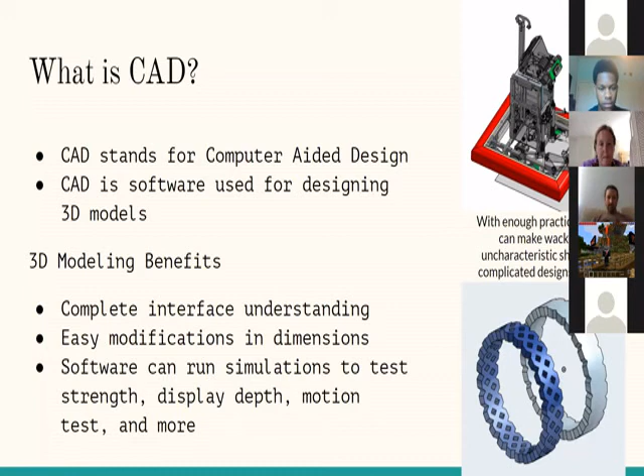So like the skyscraper example I used earlier, there's many different industries that CAD is used in. Some more obvious ones like cars, figuring out how to fit part X in place Y, all the way to graphics design and even game making. But it's primarily used in engineering, and that's going to be the primary focus of this class. We won't be going over the more digital design oriented CAD.

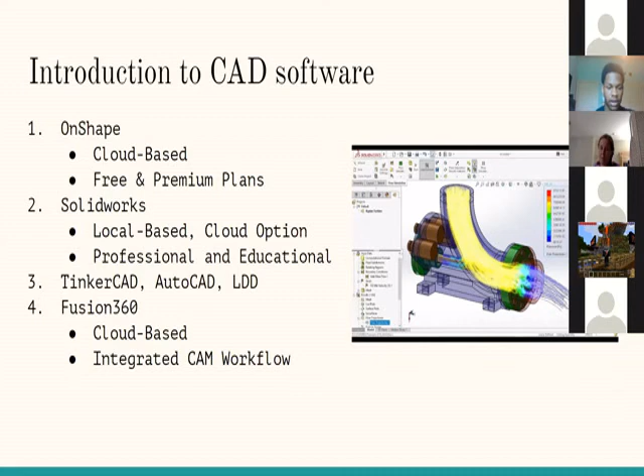All right, so it's probably about time we got started with the actual lessons themselves. So how these classes will work: we'll provide some objectives for the class and give the lesson, which will probably take up most of the class. Then at the end there will be a Q&A and a quiz, and once that's done we'll provide some fun practice activities for everyone.

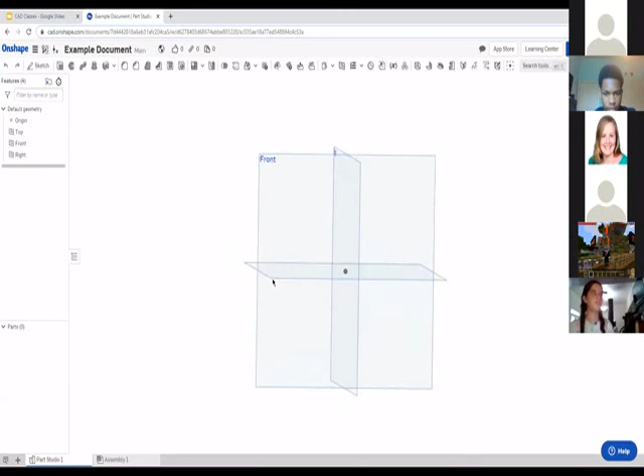So anyway, you'll notice that you can drag the view around. You see the top plane, the front plane, the right plane. At the top right, you'll notice there's a cube. This cube corresponds to the model and these planes.

If you click on the front face of the cube, it will put your view perpendicular to the front plane.

Then there's also the corners of the cube. You can press those to get a trimetric view. Same for right and top. I can click it.

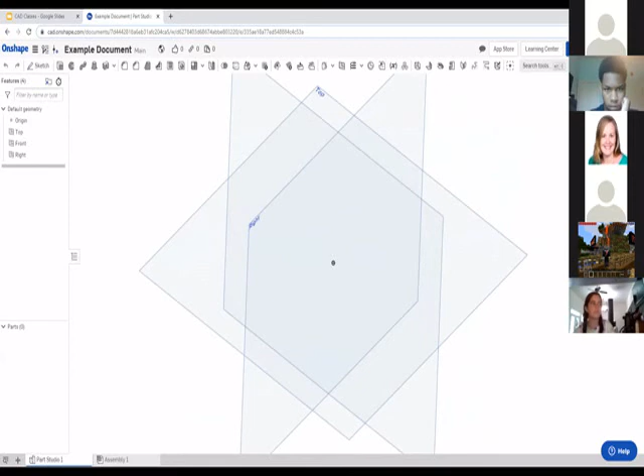And then you may think, well, what about the edges? If you click on an edge, it will take you to the opposite side. So now it says front backwards, and I am looking at the back of the cube.

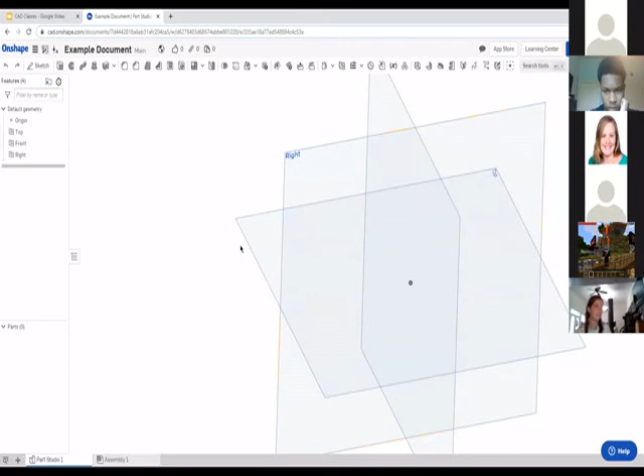Sorry about that. You may also notice there's a couple different options here. If you click the option box right by the cube, you'll see there is an option for isometric. This will take you to a view where one unit this way is the same as one unit this way or this way.

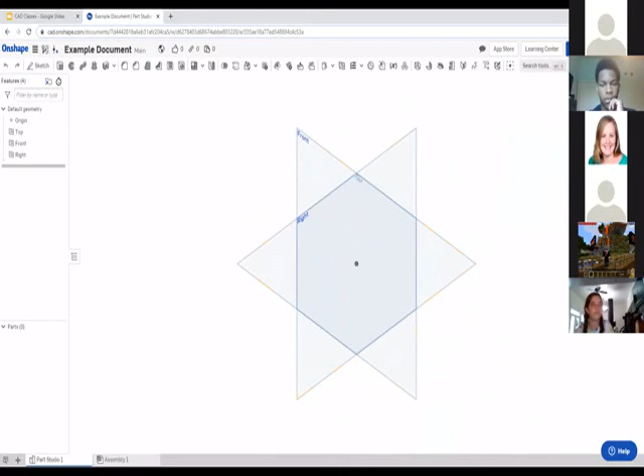It also looks kind of strange at times. It can lead to some fun optical illusions. Then there's also the dimetric view, where the x and y axes correspond perfectly to each other. However, the z-axis is slightly off, as you can see by this.

And then there's the original view we're at, which is trimetric. It's a pretty good way to get an overview of a part. It's also what clicking on a corner will take you to.

There's also some other stuff, like you can turn on perspective. By default, the editor is in a mode called orthographic view. This means that no matter how far away something is, or if it's offset, it'll still be the same size.

So for example, normally if you're looking at a super tall building, the base of the building, you're pretty close, you can see it fairly well. When you look up at the top, the top looks a lot smaller because it's far away. Orthographic view makes it the exact same size. This might be a little weird when you first start using Onshape, but as you use it more, it'll just feel natural.

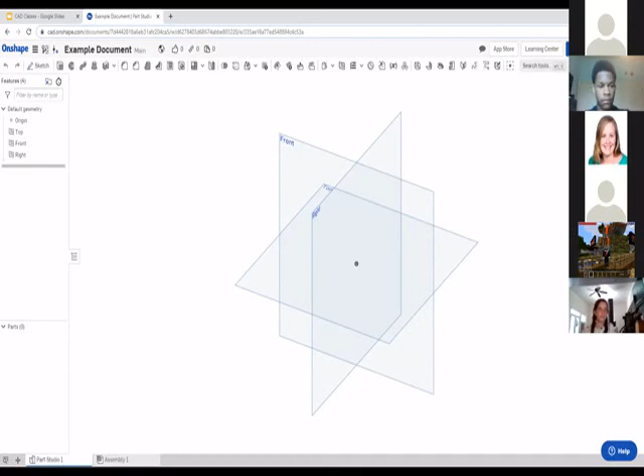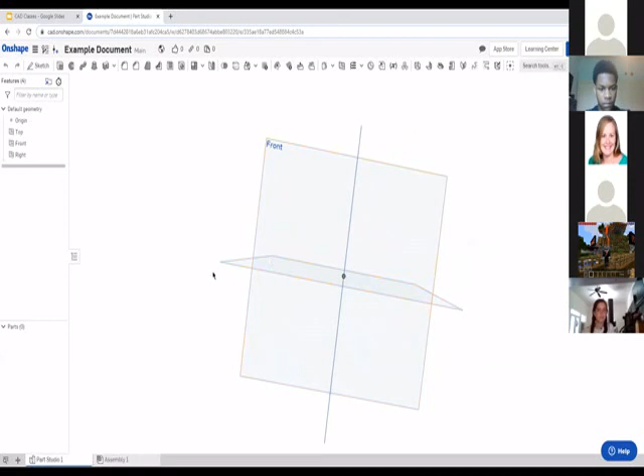However, since I'm in orthographic view, I could show that yes, this line and this line are the same length. I turn perspective view on, suddenly this looks more like the normal 3D you'd probably be used to, and these lines are different lengths. Turn perspective off, they're the same length again. That might have been a slightly confusing example, but hopefully you can see what I meant.

So next we'll be just going over all the tools we have. Probably the tool you'll be using the most is the sketch tool in the top left.

It's used for creating drawings, which can be used for making pretty much any part you want to make. The next tool you'll probably be using a lot is the extrude tool. The hotkey for this is Shift E, and the hotkey for the new sketch tool is Shift S. Those will probably be the tools you use the most.

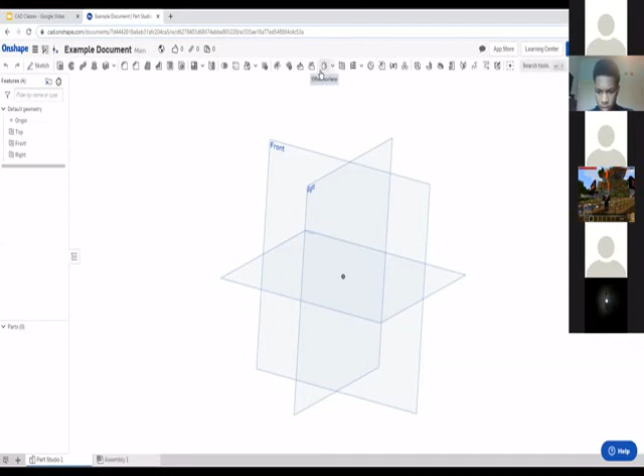We'll be going over most of the 3D tools, which are what you see here, in later lessons. However, you don't need to make your own document now. I'm just trying to show roughly where everything is, so you know where to look when you start to make your own. If you want, you can start to make your own once we get to sketches. However, we're not quite there yet. I'll tell you when we do get there.

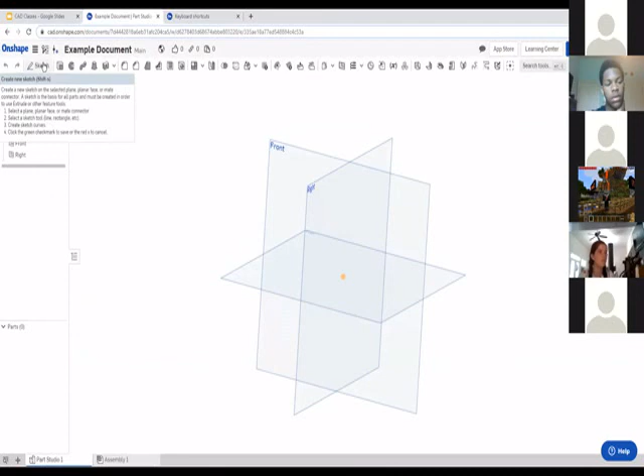So I guess I'll go into the sketch stuff, or I'll start showing sketch stuff. You don't have to start creating your own sketch yet. But so anyway,

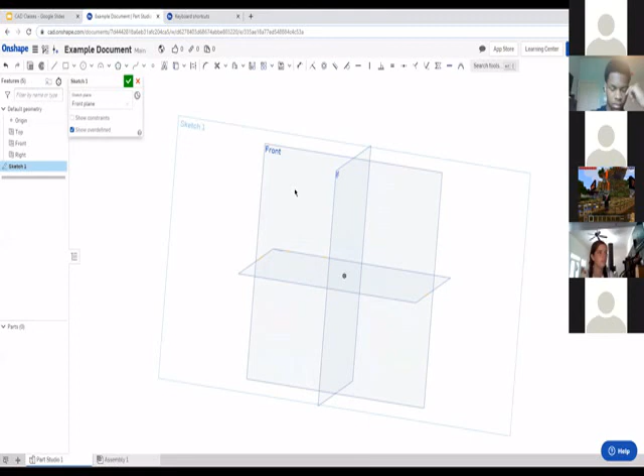I am going to create a sketch on the right plane, and the significance of each plane is to show, like, the front plane - this is the front of whatever. Oh, I created it on the front plane, so I clicked by accident. But the front plane is the front of whatever you're trying to make. The right plane is the right side of whatever you're trying to make. So obviously, if you're looking at it from the left side, it'd be the left side. The top is the top of whatever you're trying to make. But in this case, since I clicked on front by accident instead of right, we'll be making our sketch on the front plane.

So to easily navigate, so your view is perpendicular to whichever plane you want, you could just try to eyeball it - oh, that looks about right - but you can still see that the other planes, it's not perfect, and it's slightly rotated to the right because I didn't drag the view properly.

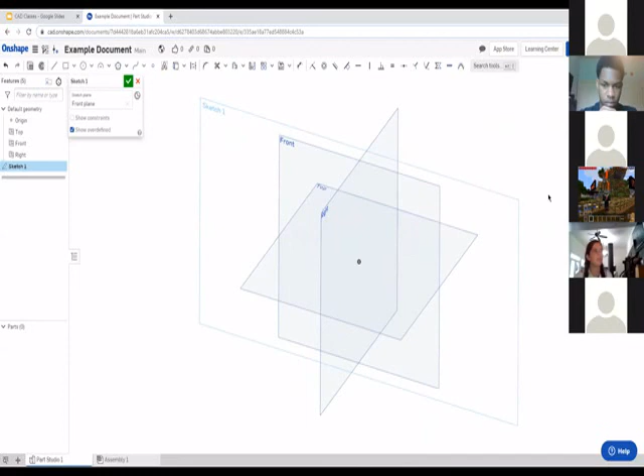So the best way to do it, the easiest way, is probably view normal to sketch plane, which will just take you to a perpendicular view. Or if you click on the cube in the top right, you can click the front side and it'll take you right to the front of the cube.

So we have our sketch laid out, but there's so many tools. How do I know which one I want to use? I'll start by saying you probably don't want to use the extrude or revolve tools yet. Those are used for creating 3D shapes. They're not necessarily something you would need for a sketch. Or, well, you'll probably use them on your sketch, but they don't... I hope that makes sense.

So anyway, there's a couple tools you'll probably be using quite a bit. The line tool, the rectangle tool. Personally, I find that the center point rectangle is actually slightly more useful than the corner rectangle, so I usually leave that one selected. There's also the center point circle. You can also create a 3-point circle or an ellipse. More useful tools: a 3-point arc, a tangent arc, a center point arc, a conic. There's also two different polygons, one with a circle inside it, one with a circle outside it.

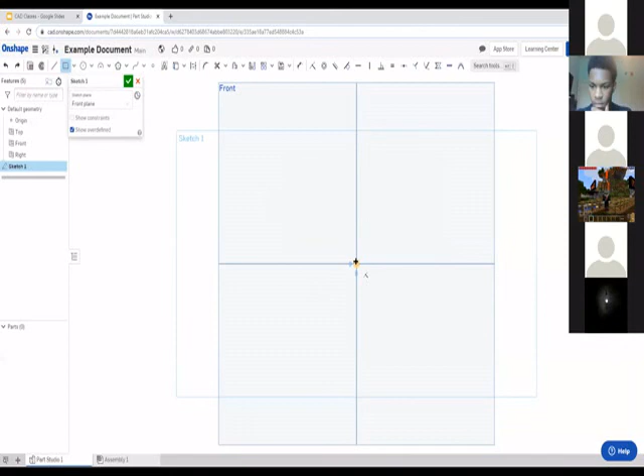So for line, the shortcut is L. Now I have the line selected, so I can just draw a line. For a corner rectangle, the shortcut is G. You can see it automatically changes it to corner rectangle. Start at one corner, drag to the next corner - that's my corner rectangle. Then if I want to create a center point rectangle, which I feel like these are a little more useful, you'll probably see why in just a second. I press R, you see it automatically changes it to a center point rectangle. I click at the center of where I want the rectangle to be, just drag it out from there. You could pretty easily create whatever rectangle you want.

So next we have the center point circle. You could press C for that. It automatically selects the center point circle, and to make one, much like a center point rectangle, you click at the center of where you want it to be and drag out from there.

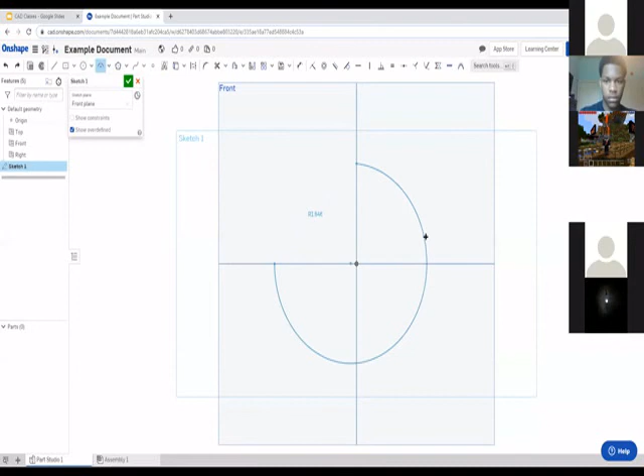There's also a 3-point arc, which you can select by pressing A. I'll put one point here, one point here, one point here. Look at that nice little arc. And you can get there by pressing A.

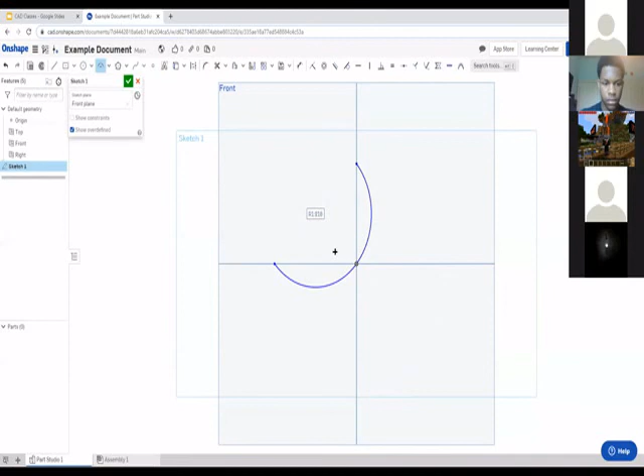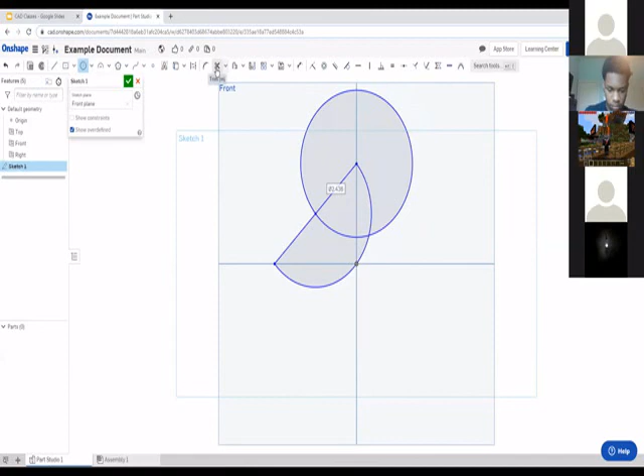Probably the next most important tool, because sure, you can draw any design you want. Let's do that. Okay, so we have a semicircle and a circle, but there's these lines here. What if I don't want them? We could use the trim tool. You press M for that, it selects the trim tool, and you just go, nope, I don't want you, I don't want you. And now it's all one continuous shape.

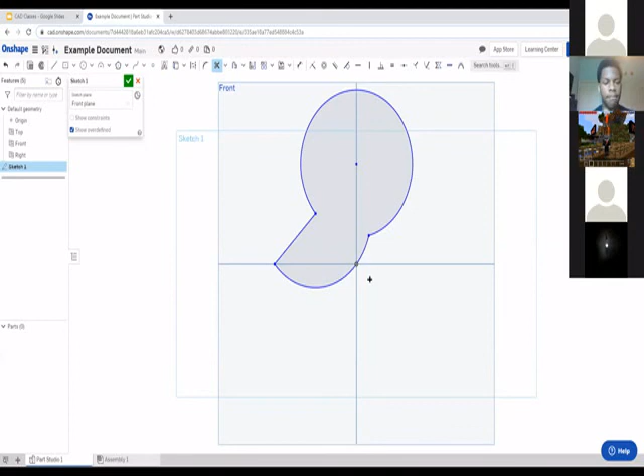This can make designs a lot easier to understand. So instead of having 20 different lines going everywhere where you can't tell what's what, it's just one big shape, very easy to understand. It also helps when you're going to extrude, because you don't have to select each individual area, which could get complex if you have some really tiny areas.

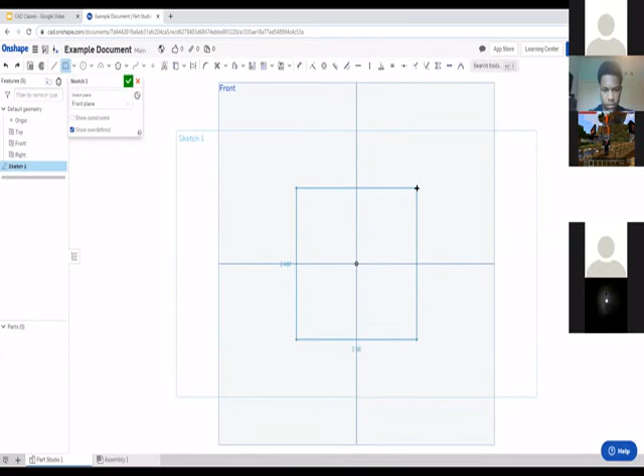So another extremely important tool - let's get rid of all this. Say I am trying to draw a rectangle of a certain size. I could just try and draw it to the right size. Okay, let's put that there. Yeah, it looks about right. But this isn't exact, this isn't precise. I don't know exactly what I've told the computer the size is.

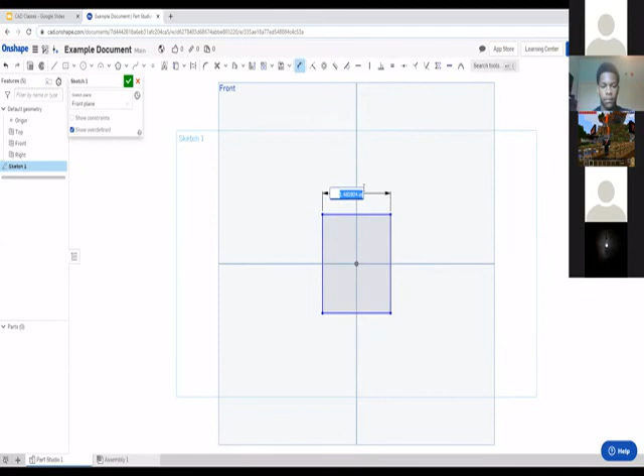So to make sure it's the exact size I want, I can use the dimension tool. You can access this tool with D, and it lets you set a dimension for any part you want. For how wide the rectangle is, I can set it to, let's go with 1.5 inches. So now these lines have turned black, meaning they can't move anymore. If I turn off the dimension tool, I can't move those lines side to side - it's stuck at 1.5 inches wide.

I can also do this for the height. Let's go with 2 inches. And now I can't move any part of this at all. This is a fully defined sketch.

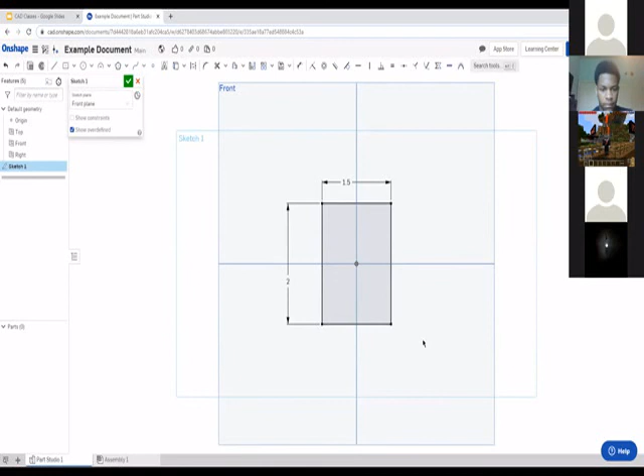All right, where are we in time? Try with a circle showing the... yeah, I guess let's mess around with rectangles and circles now.

So let's start with circles. So I want to make a pipe, and I want to make sure it has a certain cross section or dimension. So how do I design a circle with a hole in it? Because as you can see, the standard circle is just a circle. This could be a solid stick of something, it could be anything.

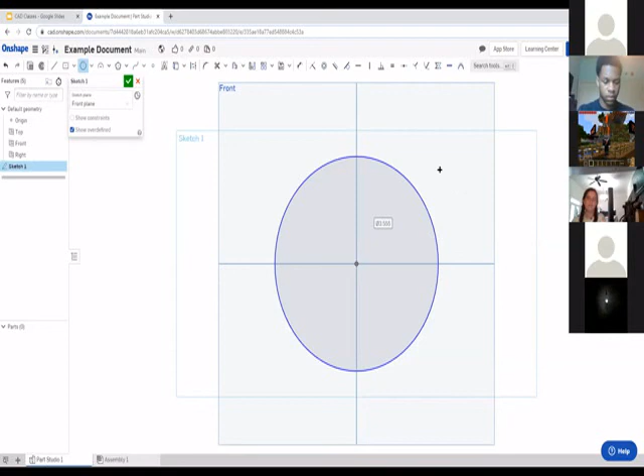Well, first I'll create my circle. How large do I want this to be? Let's make it fairly large, let's go with 4 inches. It'll automatically resize it to 4 inches. So okay, we have this now.

Now, how large do I want the inside diameter of the pipe to be? Well, there's the actual diameter of the circle we could define - I could put it as 3.5 inches, giving some pretty thick quarter-inch walls. Or alternatively, since here I have to manually do some guesswork - oh, the outside's 4 inches, if I want walls a certain thickness, the inner diameter has to be this wide.

So instead of doing that, we can actually dimension from the circles to each other, and it makes it super easy to see - from here to here, we can make it, let's go with 1/16 of an inch.

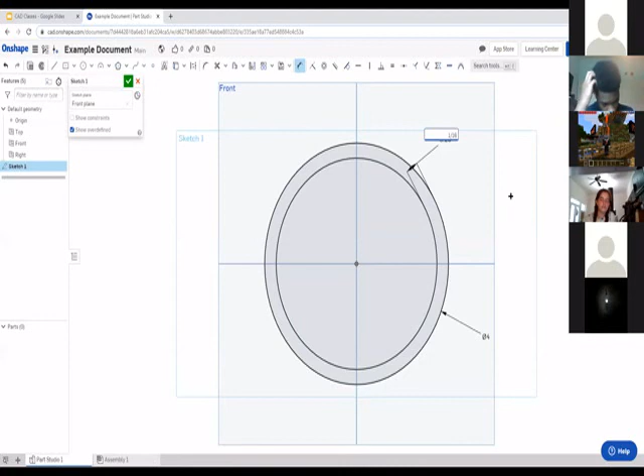So say I want to set that to 1/16. You can see that now it is at 0.0625 inches, although I have mine set to round a bit before that. I think that's actually how it's set by default.

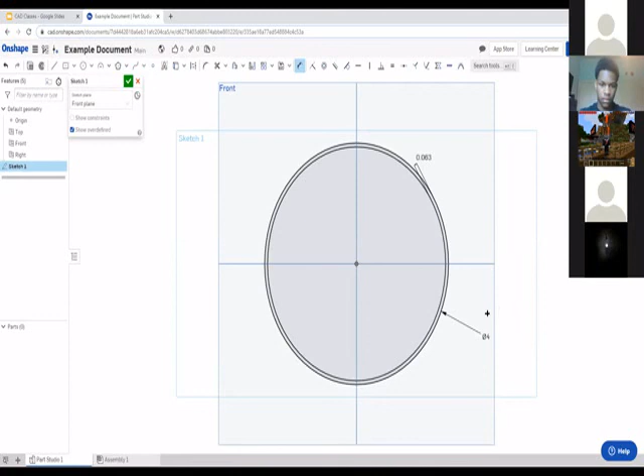So yeah, I have a 4-inch pipe with 1/16-inch walls. Maybe I can find some use for that, if I need it for some project I'm doing. But say I don't need that, I'll just delete all this.

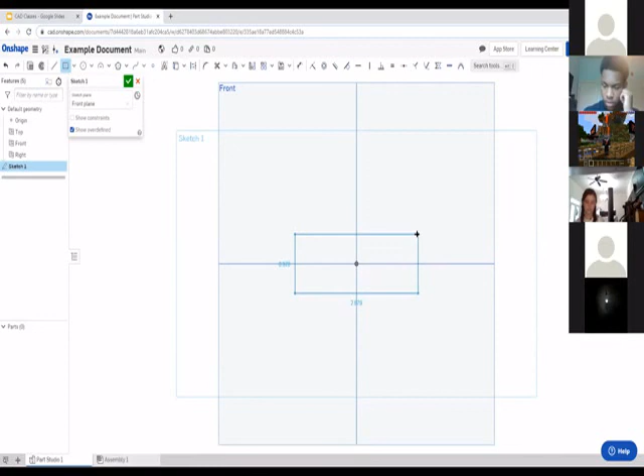I want a rectangle. I want a piece of aluminum stock that's like 1 inch by 2 inches wide and has a 1/16-inch thick wall. Like I was showing earlier, you can just try to guesstimate, like oh, it should be about this big, but that's annoying. Let's just draw it this big for now, and then we can use the dimension tool to scale it down.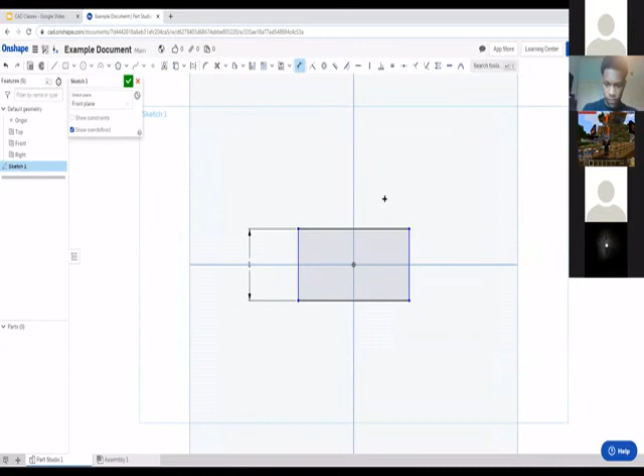So the height, how tall do I want it to be? I want it to be 1 inch by 2 inches. The way I've drawn this, it seems that I want the 1-inch side to be the height side, so I'll put 1 here. As you can see, Onshape automatically scales it down. However, since it doesn't know exactly what you want to do, it doesn't define the top side. So since I didn't quite draw it as a perfect 1 to 2 rectangle, it's slightly off.

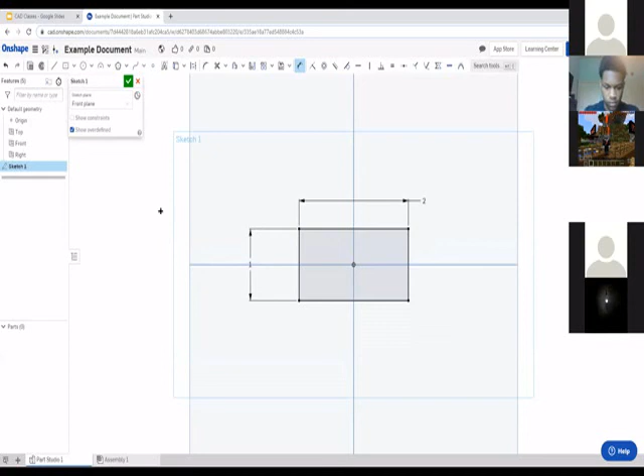I'll now set this to be a 2-inch wide rectangle. Okay, we have our rectangle, but now we have to do the same thing for the pipe, where we want to create the walls inside it. So it's just a weird thing like that to make it a little easier to click on.

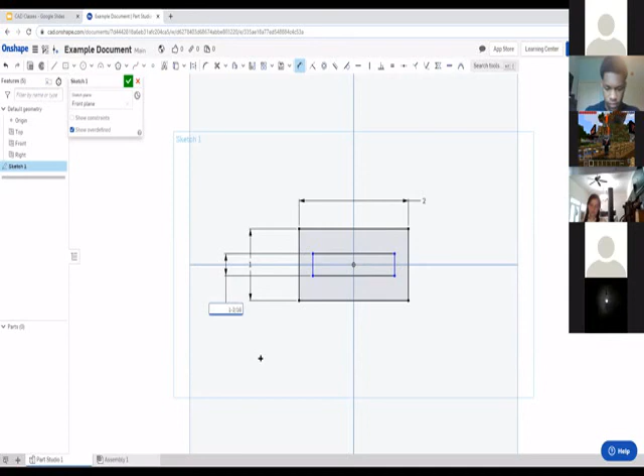So first we want to do the height. We could just go like, oh, I want it to be 1 inch minus 2/16, because I want 16th-inch walls. So sure, you could do that, and it'll put the height at 1/16 from each wall. But that's difficult. It doesn't look nice. It's a little harder to understand.

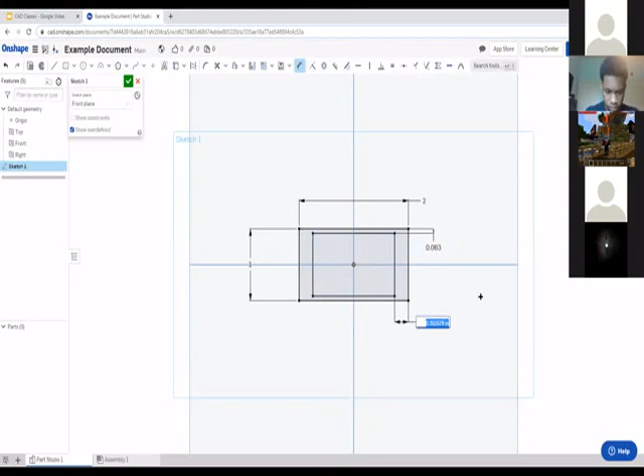Instead, we can actually just set the wall thickness straight out. Let's go here, okay, this is a 16th of an inch. We can do the same for here. Set this to 1/16 and done. So now we have this piece of aluminum stock. We can use it for pretty much anything we need, which is pretty helpful. What else do we need to do?

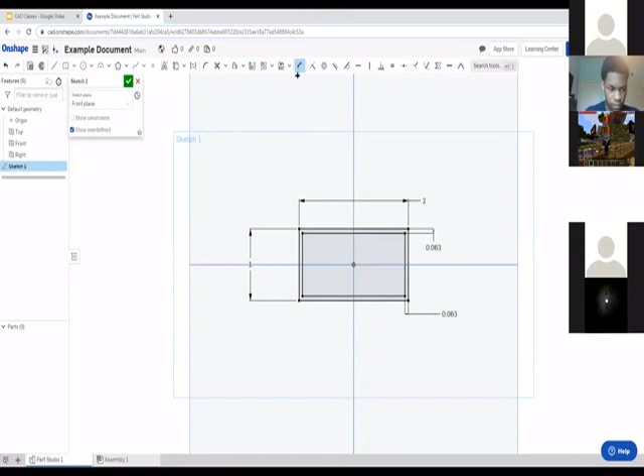Someone asked, can you move a sketch after it is placed? And the answer to that is yes, sometimes. This is actually something I think I forgot to mention. It can be a little annoying when you're trying to make a super complex drawing, but most of the time it's actually fairly useful.

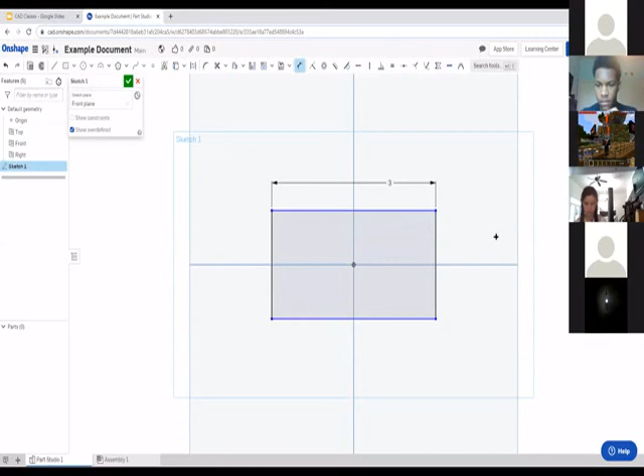So if I want to draw a rectangle at the center, I'm like, okay, this is my rectangle, let's make it 3 inches by 2 inches. As you can see, all the lines are black, and if I click on the line and try to drag it, I can't move it. It just automatically goes to the select thing.

This is because of something called inferred constraints. For example, if you are trying to create a center point rectangle and you create it from the small dot at the center called the origin, it will assume that you want this rectangle to be permanently affixed to the center, which for most uses is probably what you want, but sometimes you might have clicked it there by accident when you actually wanted it somewhere else.

I'll probably try to go into this in more depth next lesson, unless we need more time this lesson, which I hope we don't. But there's these things called constraints. If you mouse over a point, or in this case the center point of the rectangle, you can see the constraints it has on it. In this case, there's the coincident constraint. This is the one that's preventing us from moving the rectangle.

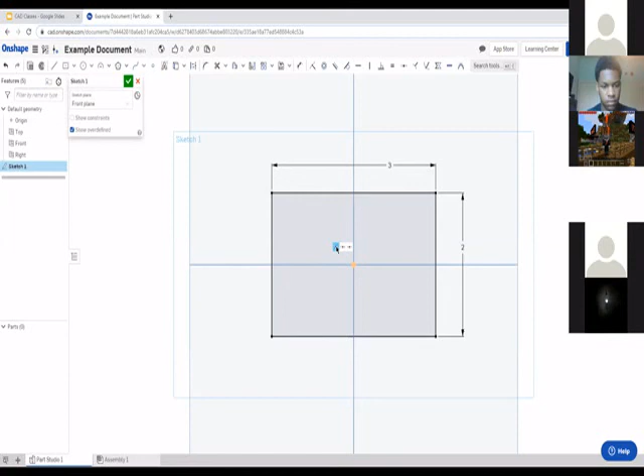We are going to want to delete this, and suddenly, look, the entire thing is blue, even though we've already defined the exact shape and size we want. So now we can move this. Let's put it over here. Come on, yeah, there we go. And say we want this to be like here.

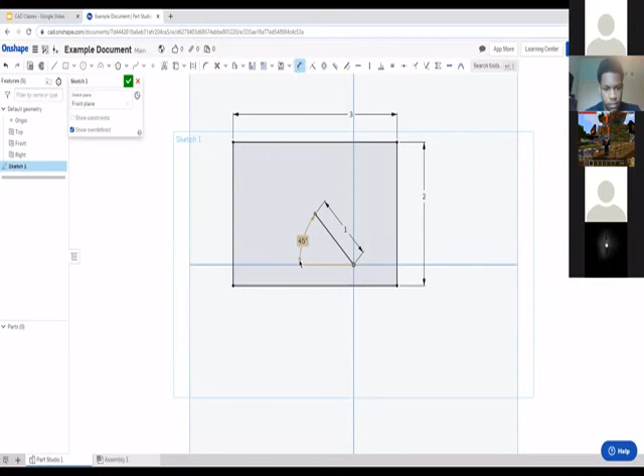Let's draw a line from the origin to here. We want it to be 1 inch away from the origin, and we want it to be, there we go, at a 45-degree angle. So this will move the center point of the rectangle 1 inch away from the origin and put it 45 degrees off. However, once I've done that, I can no longer move anything. So it's stuck there now.

Someone asked, for that rectangle, how would you cut out the center? Can you please explain what you mean by cut out the center?

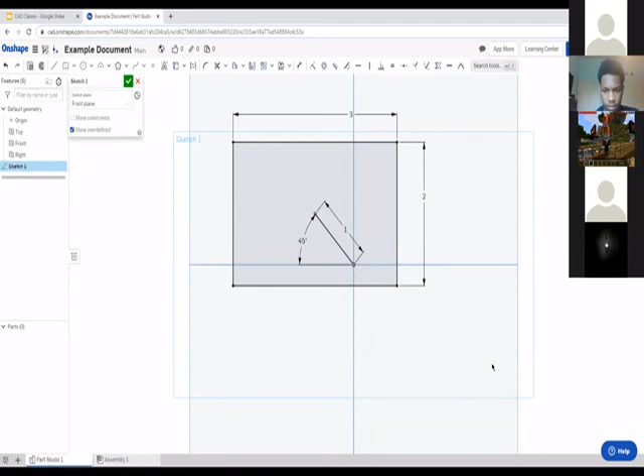I was talking about the previous rectangle, you had 2 rectangles inside of it, kind of making it like a pipe. I was wondering if there's a way you could take out the center so that when you extrude it, it's not there.

So usually, okay, first I will preface this with... that's a very good question, one that I was probably going to... no, I'll be honest, I was probably going to forget to explain that.

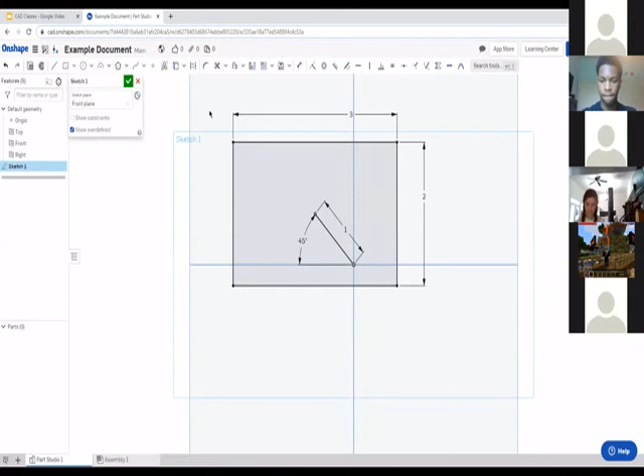In Onshape, or most modern engineering CAD software, when you're extruding something, it's pretty smart about which parts of the drawing to extrude. This goes a bit beyond where we want to be today, but if I extrude these two circles I just drew, it recognizes a circle inside a circle means the outer circle is what you want, and the inner circle is what you want cut out.

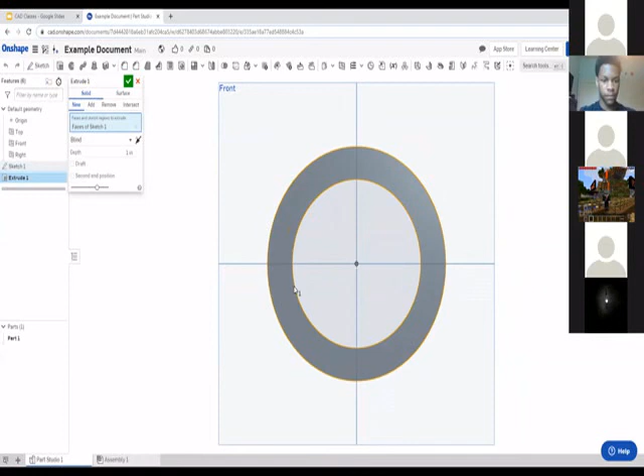But if it's wrong and you actually did want that circle inside there, I can click on the drawing where the circle would be, and it will add the circle back in. That's a little more advanced, not exactly what I was hoping to cover today, but since I was probably going to forget to mention that next time, thank you - that was a very good question. Okay, thanks, that helps.

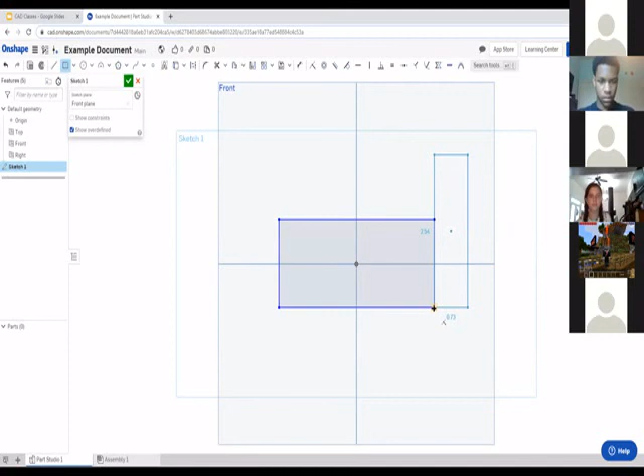I guess now let's show some good example uses for each tool. Let's start with the center point rectangle. We're going to design a castle, because castles are cool. We'll start with the base of the castle, but what's a good castle without some towers? We could say the center of the tower is here and drag that down, but that doesn't leave a very precise tower - you don't have as much control.

So instead, we're going to use a corner rectangle for that. From this point here, we could just drag up - oh, I want the tower to be here. That's a pretty nice tower.

Same over here. I started to explain inferred constraints earlier - you may notice there's a dashed line that goes across my screen from the top of one tower to the top of the next tower. That line means the tops of the towers are going to be at the same height.

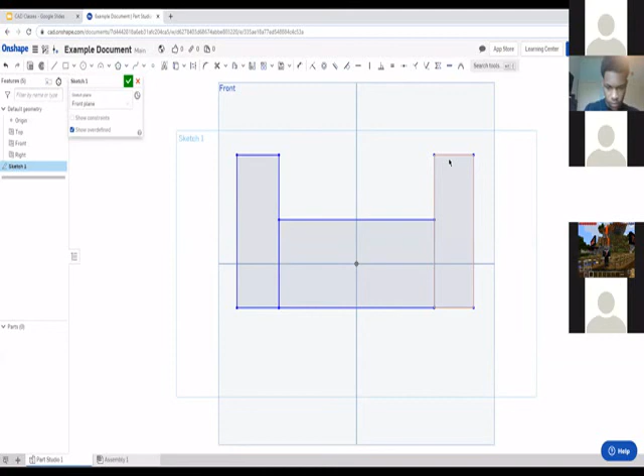So if I decide I don't like the height of one tower, I can just drag it up and the other tower goes too. This is very helpful when you're trying to make a drawing with a bunch of parts that all have to be the same length, but you don't know exactly how long until you're done drawing - you can just drag it or change one dimension.

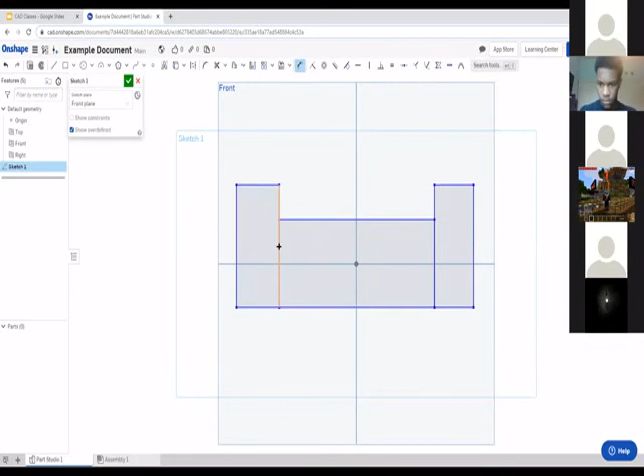Let's make this 0.5 inches. Oh, I should probably dimension this first, get rid of that. We are going to make this go 3 inches wide.

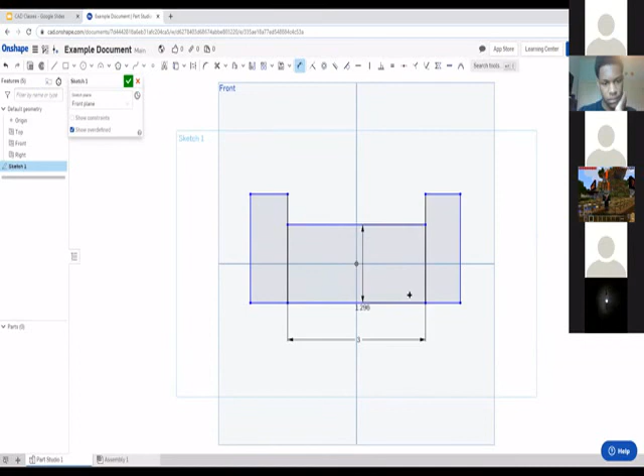Oh, and also something else I forgot to mention - if you want to set the height of something, or just a distance between two lines, instead of how long a single line is supposed to be, you just click on one line, then the next. Now look, I can change the height of this rectangle without trying to figure out which of these lines is the right one.

I can just set this to 1.5 inches, and for good measure, we'll set these to 1 inch. I have to do it for the other one, I forgot.

So now I want this to be this tall. Let's see, how tall is this? This is about 1 inch tall. Let's go with that. But hey, that's too tall. Maybe I don't like my towers to be that tall.

I can actually change the dimension by double clicking on the number. Maybe I want it to be half an inch tall. And now they're both half an inch tall, as you might expect.

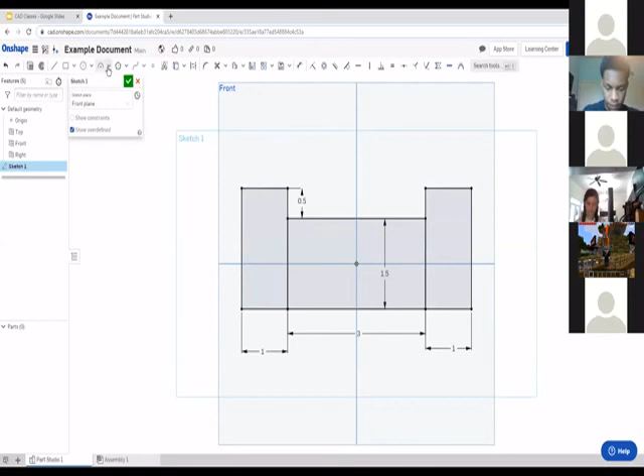So next, I want some domes on my towers. That sounds pretty nice. Let's go with a circle for that. Circles are a little easier to understand. And then, yes, center point circle.

So in Onshape, most lines, like at the very center of the line, will have a center point where if you're trying to make something else going off of that line, you can just find the center of the line. Then you might notice there's a small box around the line. That means I am going to create whatever feature I'm trying to make at the center point of that line.

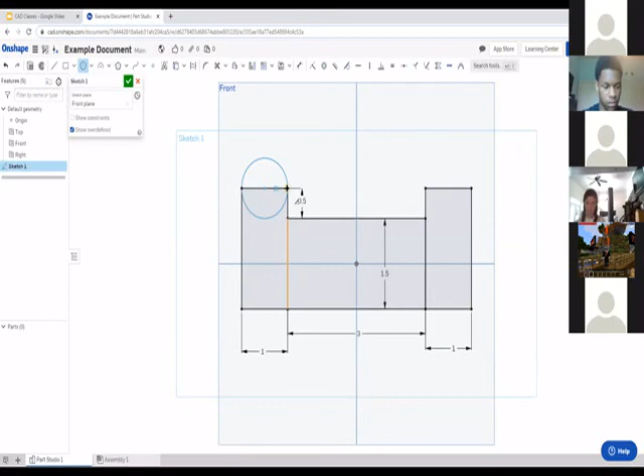So since I'm making a center point circle, I just click there, and then I click on one of the other sides of the towers, and now my circle is the exact same diameter as the tower is wide. So since the tower is 1 inch wide, I can check the dimension of this, and look, it is 1 inch wide.

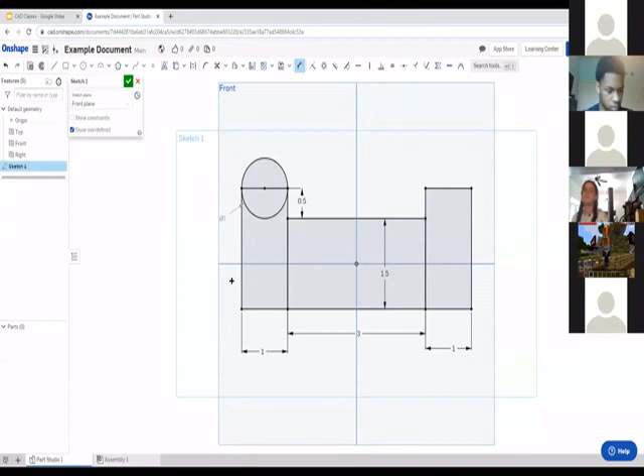Now a grayed out measurement like this means that that's already defined somewhere else. So here, since they're both the same measurement, it's no big deal. This one's just grayed out. It just shows, oh yeah, that's 1 inch wide, but it's already been defined somewhere else.

However, that does mean if I change this, let's say I want it to actually be 0.75 inches. Okay, I'll be honest, I've actually never done that in Onshape. I'm more used to SolidWorks, where it just completely freaks out if you do anything like that. But yeah, so it looks like Onshape's pretty smart about it. Like, oh, this is 0.75 inches. I'll change this. This will also be 0.75 inches.

I can just, how many times did I move that? Undo that to put it back to 1 inch. And then, yeah, I can do the same thing on the other side. We already know it's the right size.

And yes, like that would be a good point to use a center point rectangle for creating a rectangle of whatever size I want. But then it's not as convenient if I'm trying to create a rectangle in a different place. Like, oh yeah, I want this to be here instead of there.

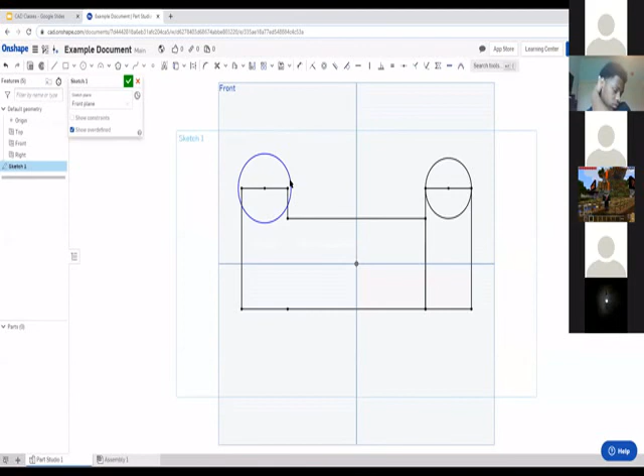So if it's blue, it means that some aspect of the circle can be moved. This is still grayed out, so it doesn't... no, never mind, I guess that's false. Yeah, so in this case, it seems that our circle isn't the same width as this anymore. I'm not entirely sure why. Sometimes Onshape just is like that. It's a kind of temperamental creature. But in our case, we can redefine it as 1 inch.

It's fine again. If I had started this dimension at the top, it's possible we wouldn't have had that problem, but I don't know, because we didn't. Actually, if I tried over here, yeah, right there, but 1 inch.

So now we go to trim the other side because I don't want that either. Yeah, that was right. So see, this is still perfectly defined.

Yeah, sometimes if you're using the trim tool to slightly change part of a drawing, you might run into issues like that where it should make sense, but it doesn't, or it's already defined, but since you had defined it somewhere else first, the dimension you made got grayed out, and it's just like, oh, this isn't a dimension. This is just telling you what it is. It's not actually forcing it to be however long.

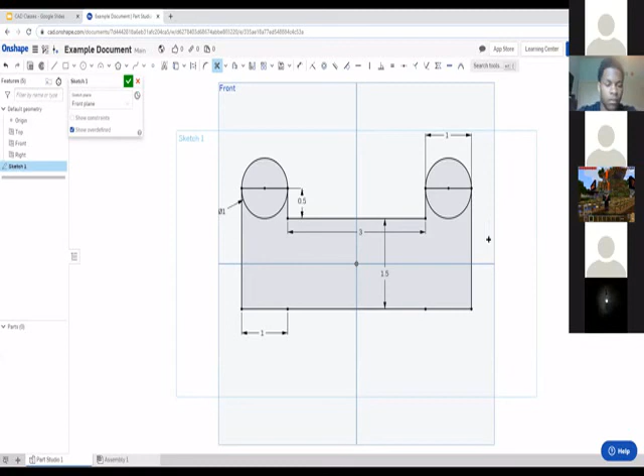But then now I want to get rid of, say, these curves here because they're ugly. It's not much. Oh yeah, this is what I mean by sometimes it's a little temperamental.

All right, let's put that back there. So there's no problems here, right? We're gonna get rid of this.

It looks like the major difference between each side of this is over here. I defined it to be 1 inch wide at the top, which meant that when the bottom half of this circle is gone, there's no issues there. Here I defined it at the bottom, so I guess I have to fix that. That, or it's with this dimension, but I'm not sure. Onshape could be super temperamental.

So let's put this dimension up here just to make it easier. I'm actually going to define it between those two lines. Yeah, so that's fixed. Let's get rid of this curve, and it's still broken. Why is it still broken? Well, it's not causing problems over here anymore, that's a good thing.

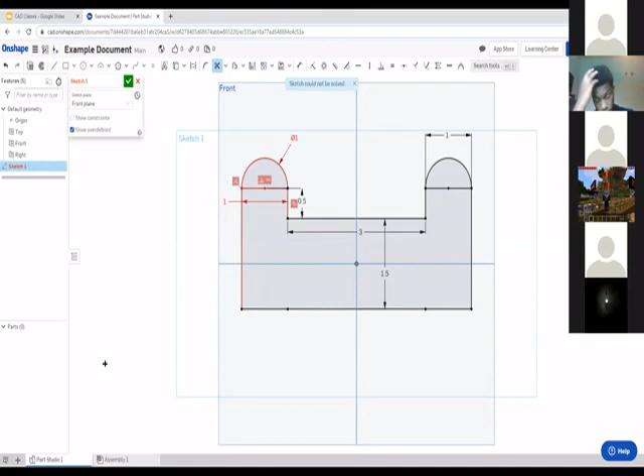Put that back there, get rid of this. Let's try this now. Nope, still does not work.

Sometimes you'll run into problems like this. It can be kind of hard to figure out why something's working or why something doesn't work. I'm pretty sure I've had times where something's defined, but I don't know why it's defined, or it's not defined how I want it to be. That doesn't make sense, so you'll have to go into the constraints and stuff, like this is this, which can get kind of complex.

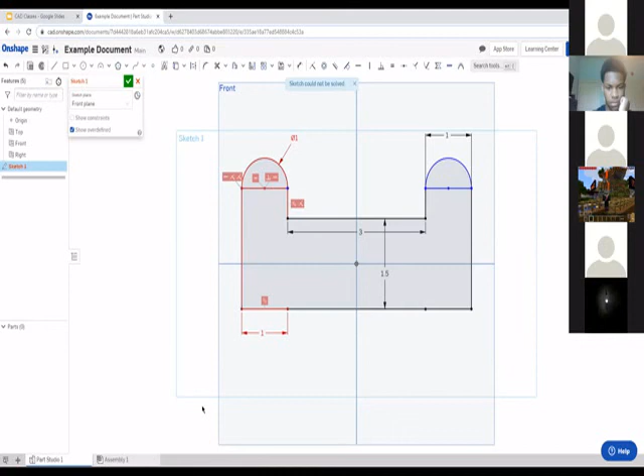I'll probably try to explain that later, I was hoping next lesson. But yeah, so sometimes you'll just have some issues like that. And there's not always a need to make something defined, actually in this case there is because it's a proper circle.

Sometimes, say I want there to be a circle, or like the bottom half of a circle. Let's go with a tangent arc. No, a center point arc, these are easier. So I want to have the bottom half of the circle here.

Okay, so we have our circle and it's split into two halves now, but I don't want this part here to be like the normal, like 'oh yeah, make sure to extrude this.' I want it to only be used for construction, so I can put, let's say, another rectangle at the bottom of it that's like a certain dimension.

Make it easier, so let's put this 1/4 inch by 1/4 inch. So our tower is going to have a window on it.

However, I don't want this circle, or the bottom half of this circle, to be an actual circle. I want it to just kind of be there, but not be there. This is where construction lines come in. A construction line is used for when you're trying to create a drawing, but you don't want that line to actually be put into whatever you're trying to use that drawing for.

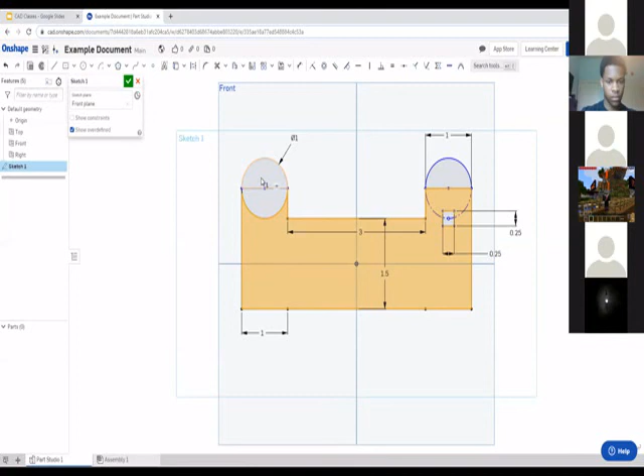So I can also set this to construction line, and if I click on it now, I can select the entire tower, and I can do that too. I still don't understand why that's here. If I do that, that just breaks it.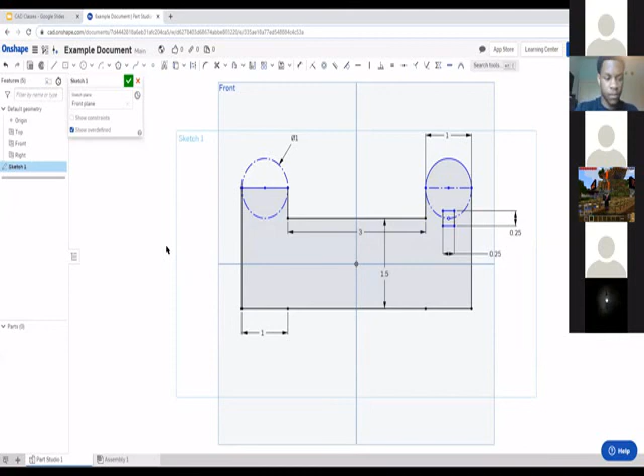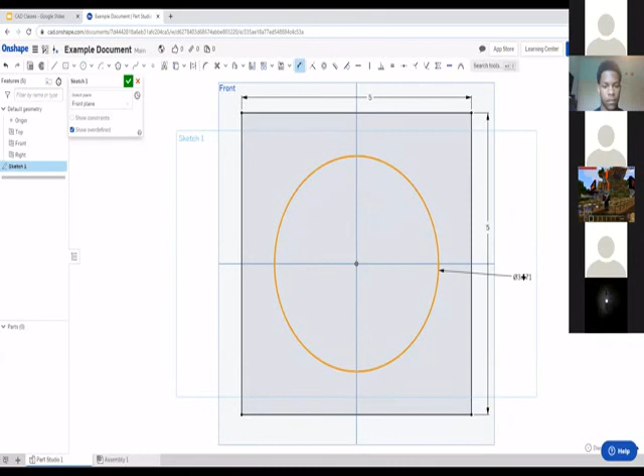Then another use for a construction line would be, say, I don't want this. I'm trying to create a 5 inch by 5 inch shape. That sounds good. So say I want to create a circle, I want it to be, let's go with a 3-inch circle.

And I want to have a smaller circle at each point.

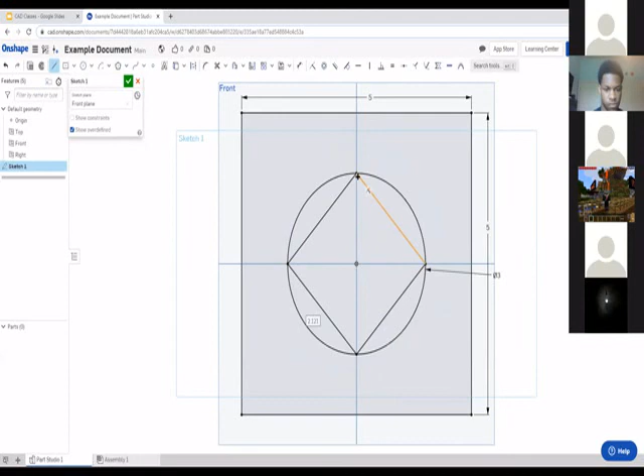So I don't actually need this circle, and I don't need this box I drew. All I need is these smaller circles. So I can have circle here, circle here, circle here, circle here, maybe one there.

And I can set these to be 1 inch. That sounds good. I didn't actually set it to 1 inch - you have to make sure to press enter, not just immediately click off, by the way. Good thing to keep in mind.

All right, so I have my plate with all the circles I need, but I don't need the inner circle or the larger circle or the box. It adds a bunch of needless complexity. So I can just press Q to turn that into a construction line, do the same for this, this, this. They're all construction lines now. So when I go to select my drawing, it's just the plate itself - the larger circle and the shape I used to help me create the circles are gone. It's not part of the actual geometry as much.

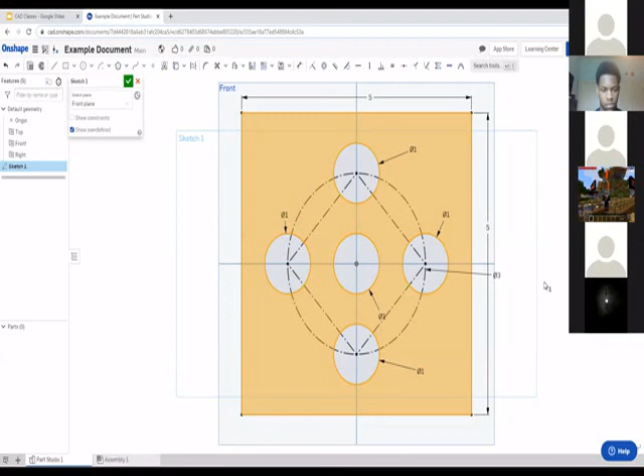But now I've shown you this way where I use a circle and just draw the points I need. But what if I wanted this plate to have like 6 holes around the center instead of just 4? It's a lot harder to say, oh, I need this to go off here at exactly this angle, go there. It's just kind of pointless. It's needlessly hard.

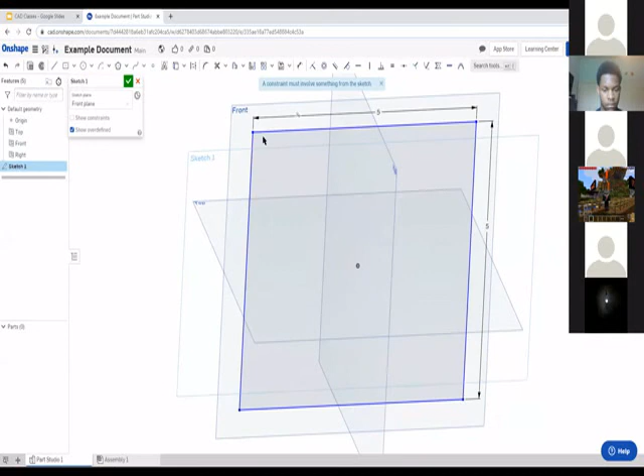So we can get rid of all of that. Apparently... hold on. Where was it? There, found it. No. Wait, all right, I'm just going to redraw this because I don't feel like trying to find the origin again - I deleted a constraint by accident.

All right, so the plate is 5 inches by 5 inches. So I want my plate to have a bunch of 1-inch holes - 1 in the center, and then 6 around the outside. I could just get creative with circles and lines, but alternatively, I could create a polygon.

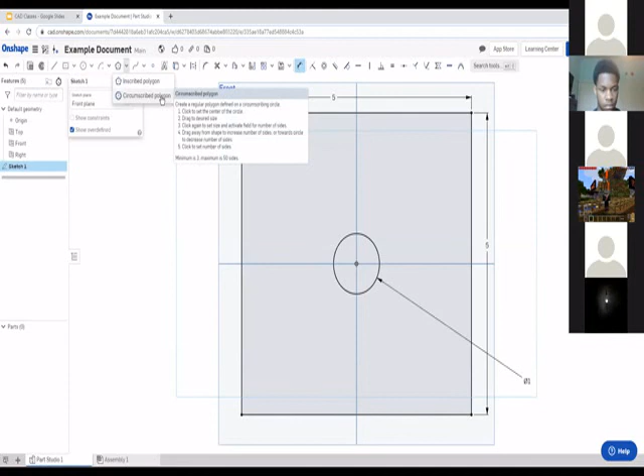In this case, we probably want to use a circumscribed polygon, I think - yeah, the one where it's inside the circle. So I want this. I probably want the circles to be on the horizontal line, so I'll make sure when I'm creating the polygon, I set at least one of the corners.

In this case, since this is a 6-sided shape, I get to have 2 of the corners on it, but I put the corner on the horizontal line. It automatically assumes, oh yeah, you don't want that rotated probably, so I'll just assume that you mean only - yeah, so that point is stuck to that line.

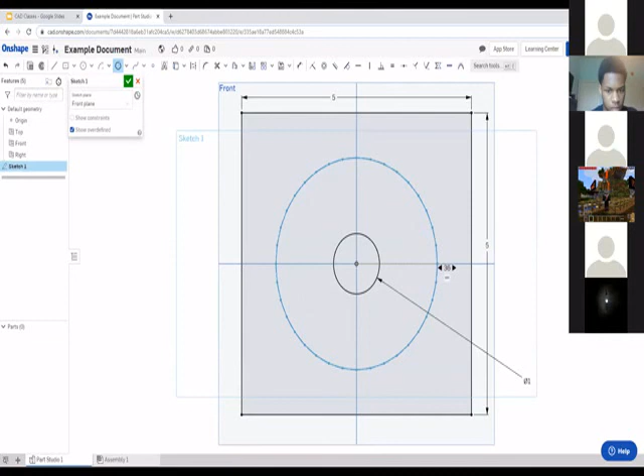But now we haven't defined how many sides we actually want it to have yet. This is just like, oh, here's a point at a hexagon. But if you drag the mouse pointer back and forth, you can see, oh, I can create any shape I want - it's like up to 32. Oh no, if I keep moving it, 36, down to 3. Oh, it doesn't keep going onto my other monitor. That's sad. Yeah, so for now, I just want 6.

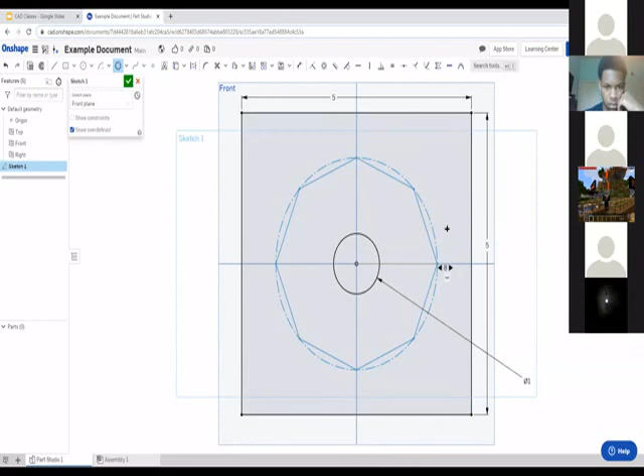If I wanted like 4, and I was trying to do the example from earlier, I could just do 4. But yeah, let's go - actually, no, 6 is probably better for space. Yeah, so we have that there. It creates a dimension like, yeah, this has 6 sides, but it doesn't say how large we want it to be.

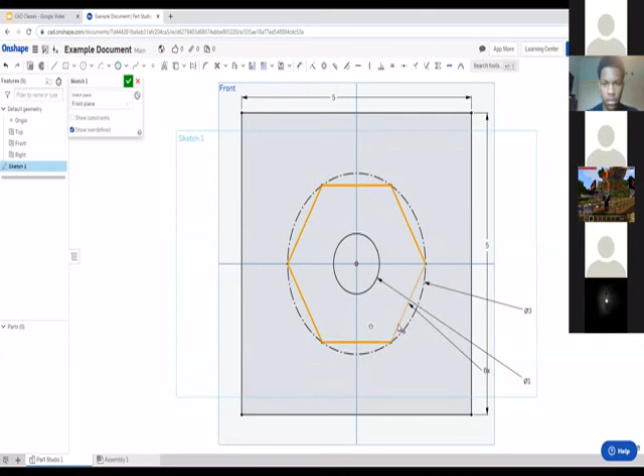Like, this could be any size. However, we can't rotate it, which is a good thing. So how far out do we want this to be? Let's go with 3 inches. So now this is defined. We probably still want to set our hexagon as construction because we don't want that to show up in the final model. And now we can just start creating circles.

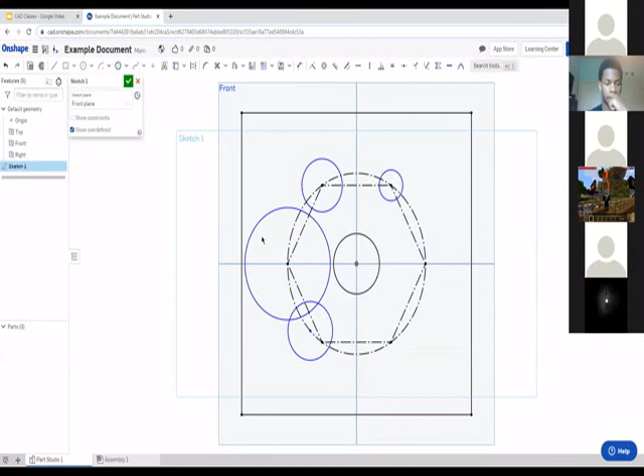Put a bunch of these around here. I created that one slightly off - so try to make sure when you're creating a circle and you want to be on a point, make sure you're actually on the point. You can create it here by accident and it looks pretty much fine, but I can drag this circle wherever I want because I didn't click on the point - all I could do is change the size, I can't just move it anywhere. So just delete that.

So we're going to keep drawing circles. Okay, I have all my circles. We're going to dimension all of them - this one at 1 inch, this one at 1 inch, this one at 1 inch. Oh, that was pretty close already. That one, that one, that one. All right.

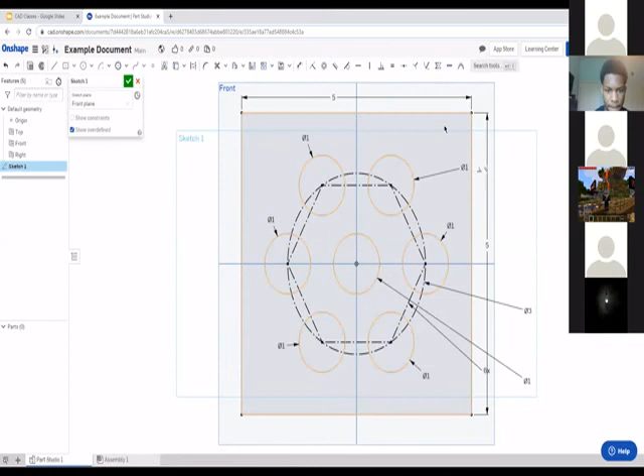Now, as you can see, I have the plate I was trying to make. It has 1 hole in the middle, 6 around the outside. That's about done.

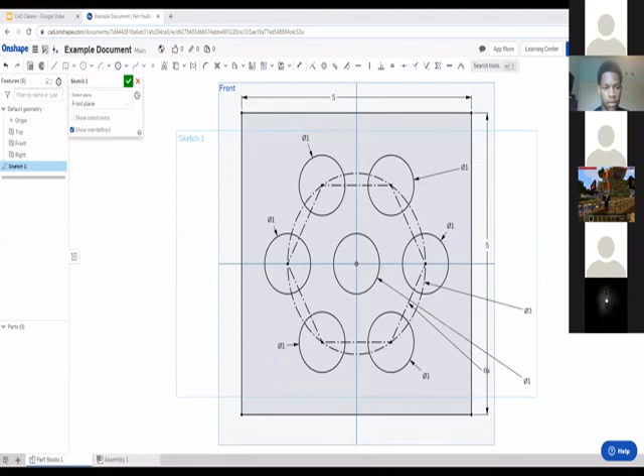Any questions, or is everyone pretty on board? I'd like to ask, if we make a document under the team and save it, will it be there for everyone on the team to see? So, if I go back to the Onshape home...

Oh, apparently I didn't share it with the team. I forgot, I have to share it with the team first, which I should probably do to make sure you guys can see my example document. Set it to can edit, or can view. All right, now you can see it.

So if you make something as part of the class, please share it with the team. Apparently just creating a document doesn't automatically put it on the team. So if it's shared with the team, anyone on the team can see it.

Speaking of which, if there's anyone not on the team, please send a message to Amy, or that person in chat. Is she still here? Oh no, she left. Never mind, ignore that, send it to me. I'll send your email to her. So yeah, please let us know if you're not on the team.